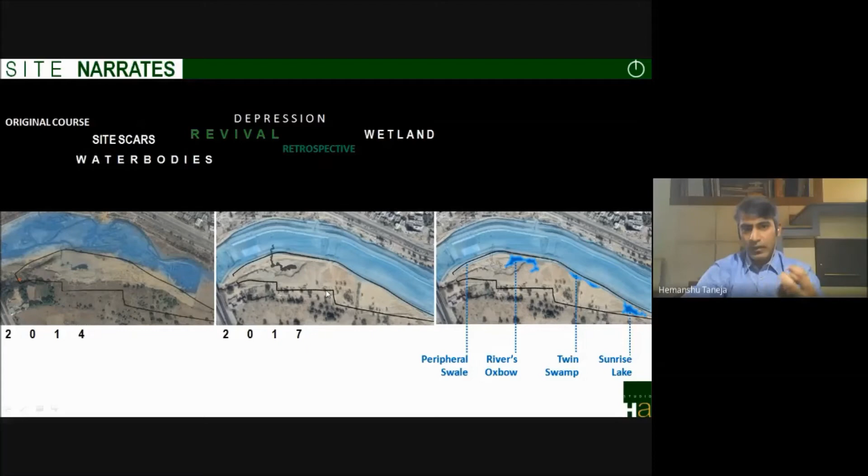So we thought of generating a small narrative, making a set of similar water bodies connected with bioswales to rejuvenate this existing element retrospectively. So this was the drainage, the slope of the site, which was towards the northern direction, and this was again a second reason of making the set of the water bodies in the northern direction connected with the bioswale.

So there were like 3-4 reasons which urged us to make the set of these water bodies connected with bioswales. First was to drain its own rainwater. Second was to generate that narrative. The third was to have the use of the northern potential edge.

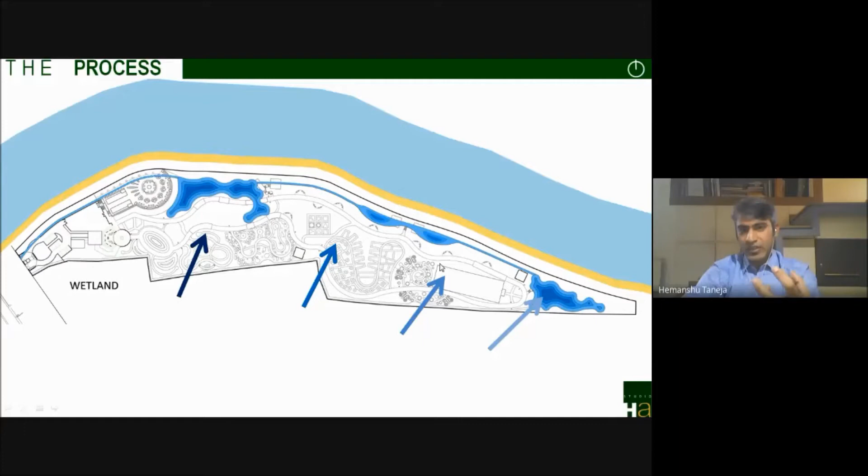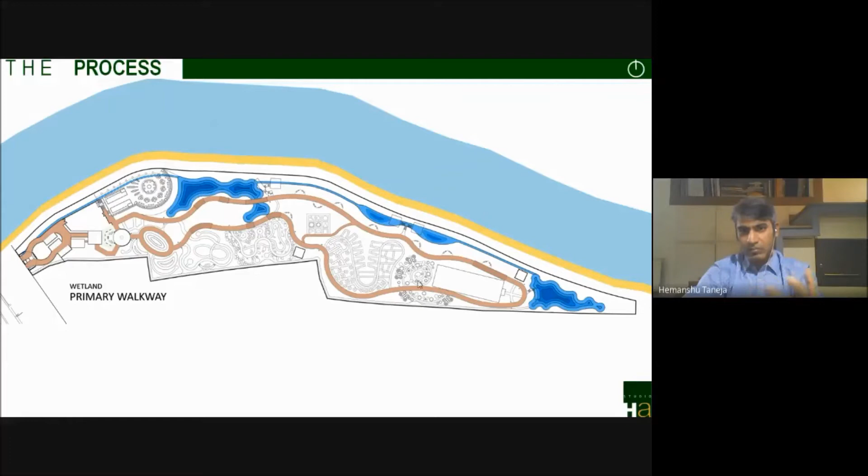And then in terms of master planning, in terms of the process, we then generated this primary loop which runs along the water bodies in order to establish all the other habitats which were required to make a botanical garden. We identified many such habitats to make it a botanical garden.

So we generated a character map to see which area fits in with which habitat. We generated many geometries to detail the connection of these botanical habitats. I will not go into detail of these habitats, but you can see these characters which we define.

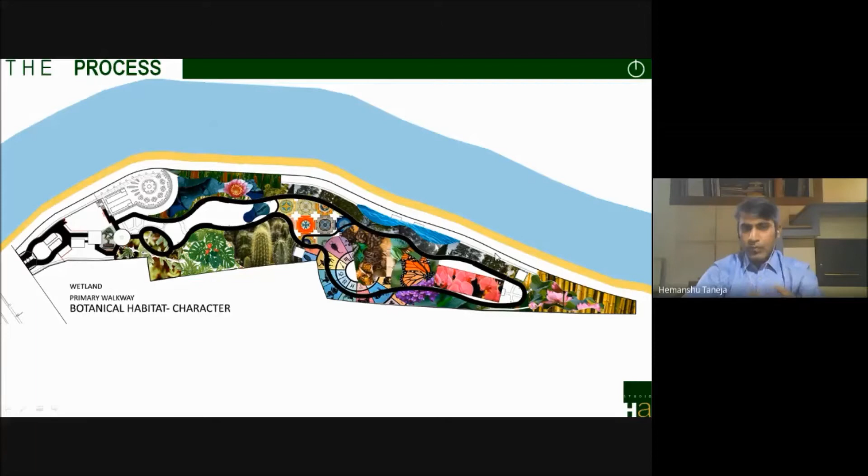You can see butterfly gardens, Ayurveda garden, Navgraha garden, the xerophyte garden, wetlands, and many other marshes. So this is how the site planning was done, and we came up with this solution.

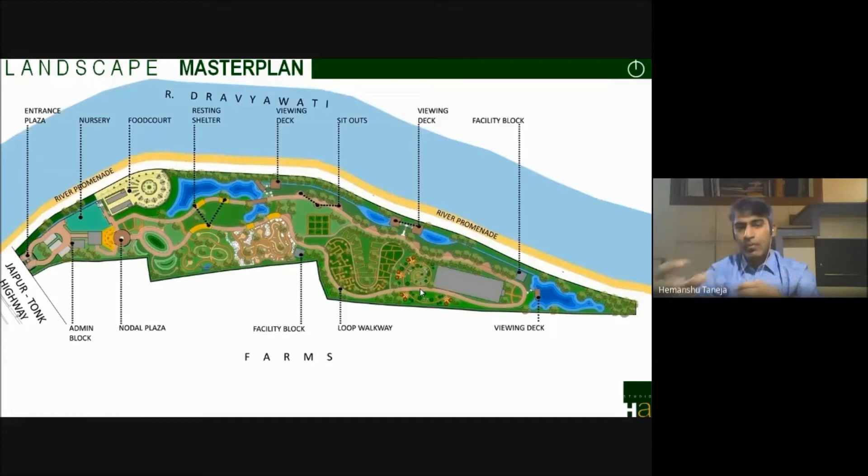So it was the amalgamation of these botanical habitats with various geometries, with the city level open space infrastructure and the facilities. We generated many viewing decks, a food court, nursery, ticket counter, and facility blocks. So this is how we made the amalgamation of the city level open space along with the habitats, turning it into a micro level ecological zone.

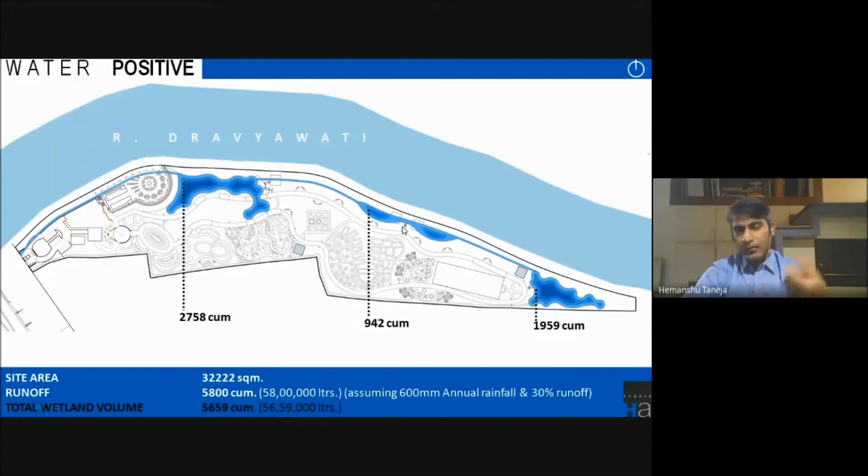So we designed these water bodies, their shapes and volumes, in order to catch 90 to 95% of its rainwater. There was a small brief calculation which we have shown here, through which we made these water bodies and located them in a way so that it catches all the rainwater, and the water remains till the summer month.

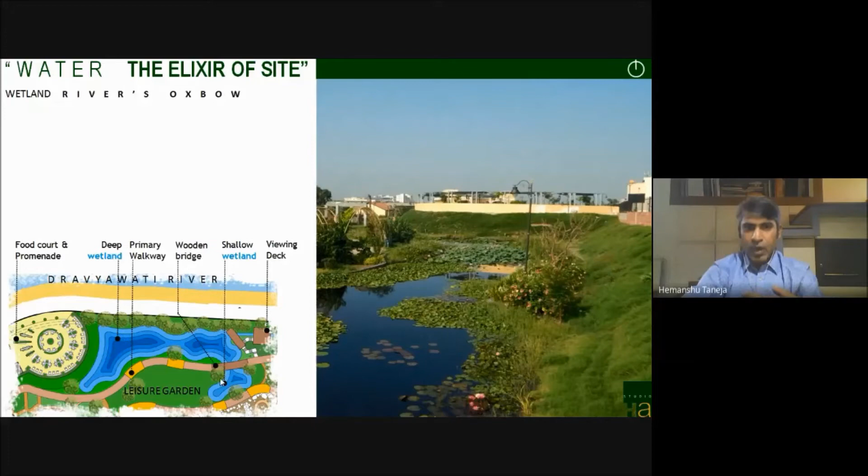So all these water bodies were located, their shapes and geometries were defined in a way that they interact with all the other typologies in the site, how it interacts with the food court, how it is creating a small ecosystem, how a water body sits in a leisure garden. You can see the relation of this food court with the water body, with the river edge, a promenade to see the views of river, and a circular edge here to see the panoramas of the site and the wetland habitat.

There was a third, last water body designed in a way called Sunrise Lake. It was designed to handle all the overflow of the water system, designed to again overflow its water to a swamp area which was the habitat of grasses and bamboos. It was located at the eastern direction, so we can also have good photographs of the rising sun and some good selfies with the morning sun.

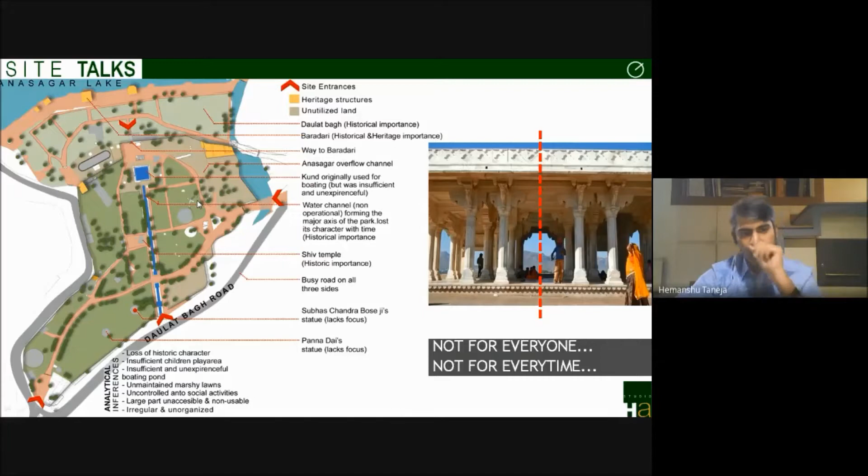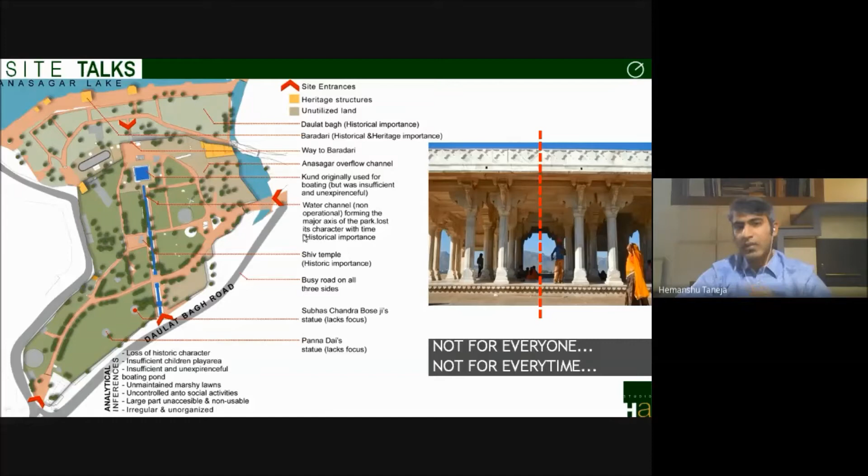The park was very irregular and unorganized, not designed well, and not working for everyone or at every time. So we designed it to work as a city-level open space for Ajmer, serving all age groups and user groups, incorporating all primary functions and leisure activities, and working across all seasons.

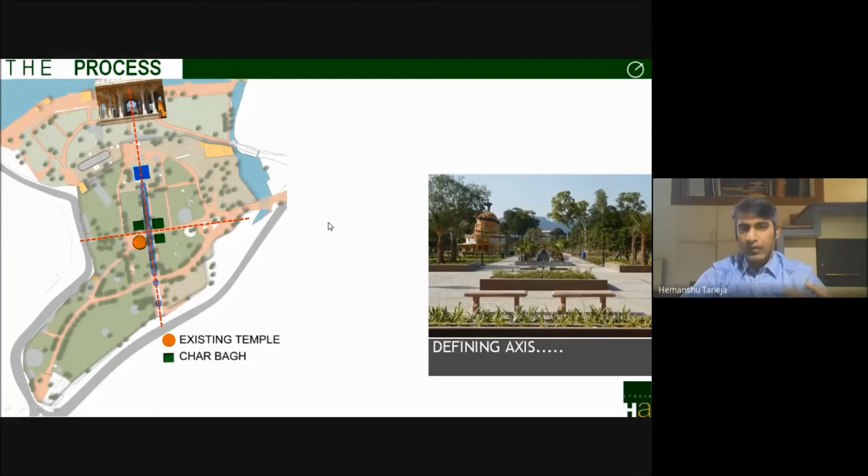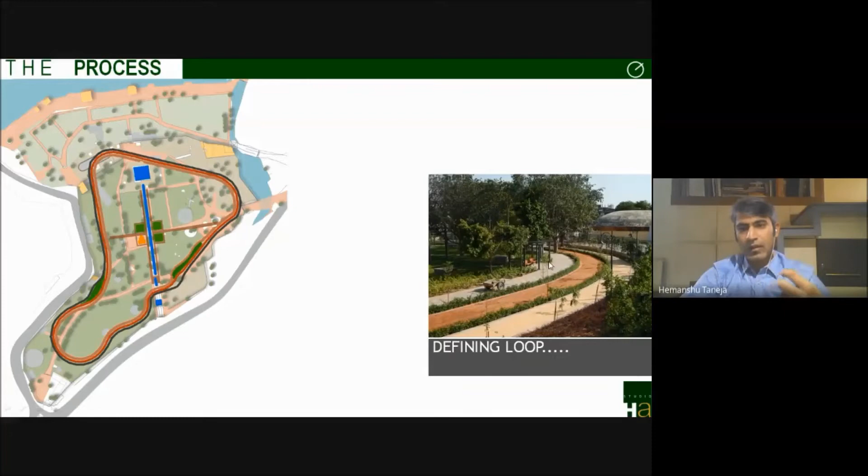In the process, we identified a primary axis connecting the Baradari water pavilion with the entrance gate along the water channel, where we designed a series of fountains and a water stream, and a cross axis respecting the temple, incorporating the four baghs to form a charbagh concept. We defined this axis, then the primary loop incorporating separate walking, jogging, and bicycle tracks with different specifications, and many crossways and nodes to respect that language and create interconnections.

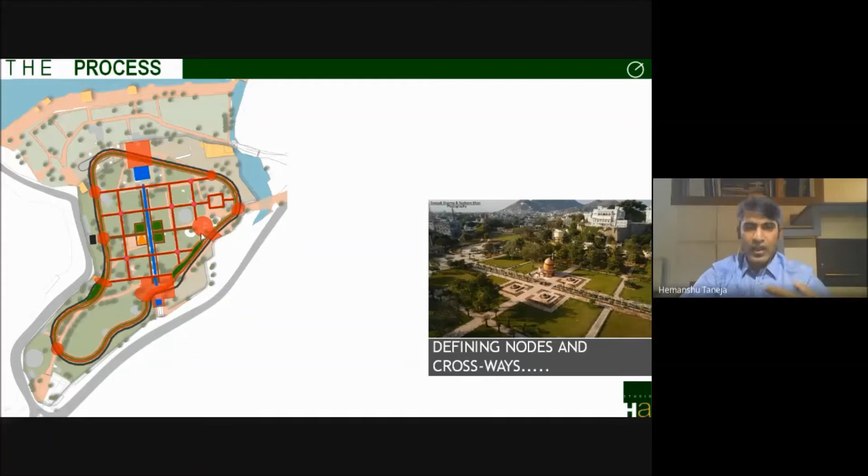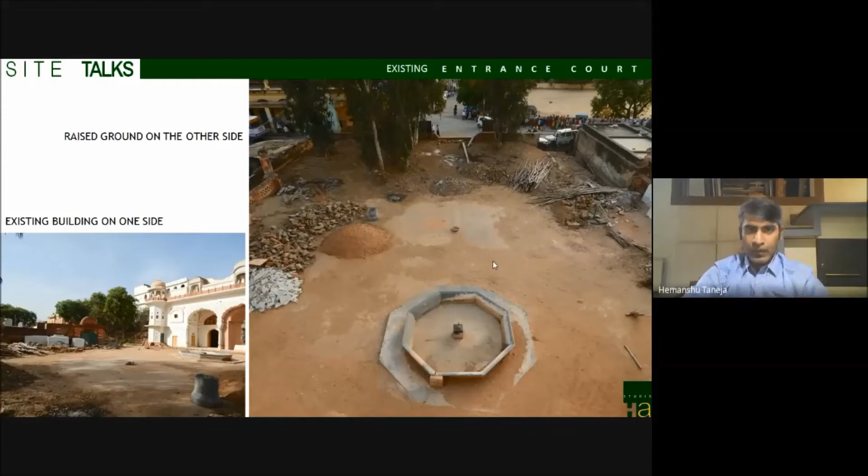After analyzing that, this is how we came up with the design solution: redefining that axis and making an open air theater over that raised ground, imagining the stage towards the direction of the palace, and respecting the old fountain by making a contemporary mandala flooring using Rajasthan stones and the locally available Khandela marble.

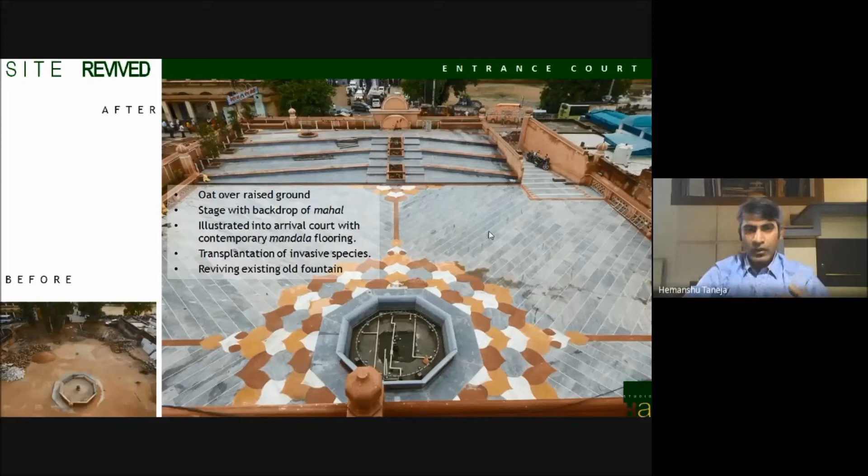This is how the fountain, the raised ground, and the existing site were enhanced and transformed. You can see in this photograph the fountain sitting with the Vivekanand Murti, and the gateway to another court, which was expected to be designed into a refreshment block.

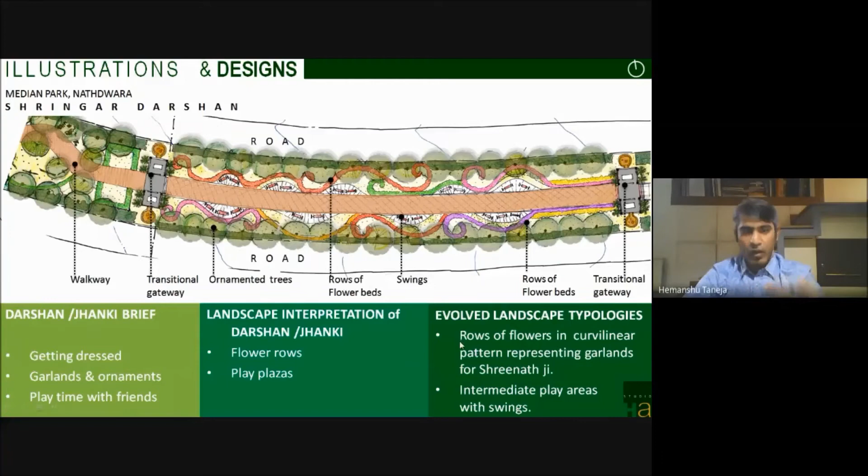You can see how we created these curves of flowers representing the garlands, and how we created these plazas having swings, creating play areas, and also acting as a waiting area along this walk.

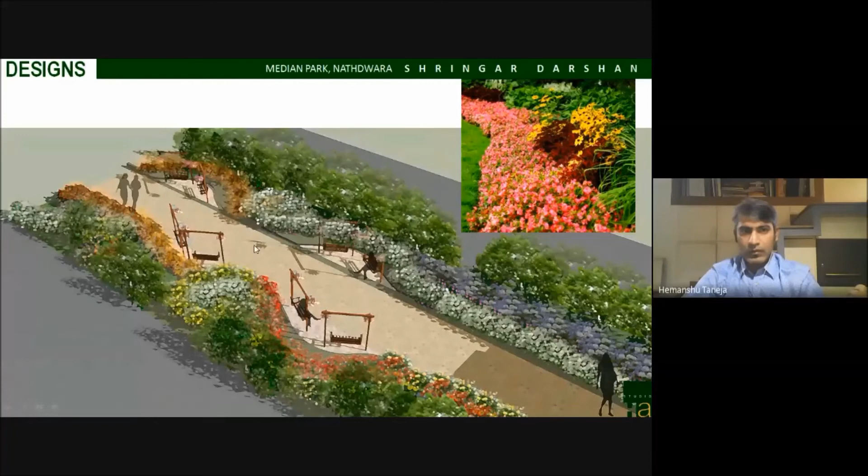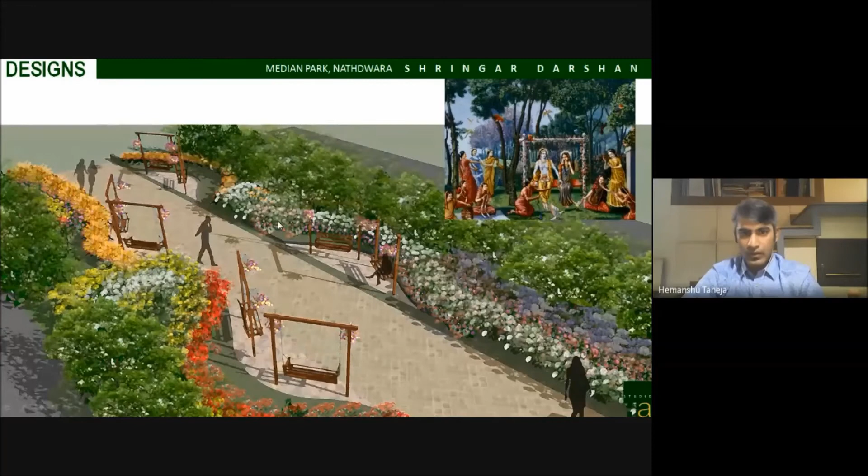You can see a few illustrations: the plaza with swings acting as a bench for the walk along this median, and the garland curves and hedges, the rows of flowers representing garland. The second darshan is Rajbhog darshan.

In Rajbhog darshan, Krishna is served with chappan bhog, a lavish lunch having varied colors and textures. It is offered, and this scene is always full of many devotees and friends.

So in order to create that scene, we thought of creating a large plaza, a large space which could occupy many devotees, demonstrating the Rajbhog again with flowers, with bowls of flowers having many colors and textures, and a large plaza having a large seating area. We also located Srinathji's Murti at the highest point of this median in order to respect the topography.

You can see the site is sloping that side. So this was the highest point where Krishna was located, and this plaza was created along with that seating and the Rajbhog bowls and the flowers.

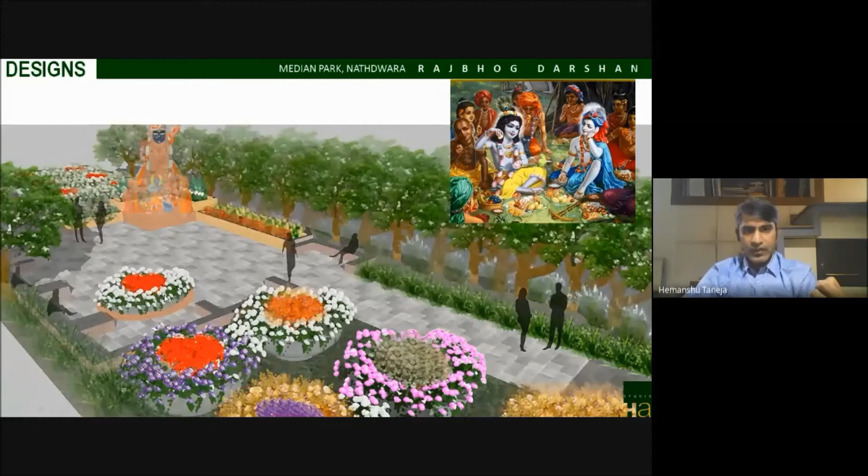These are a few illustrations showing the plaza with seating and the bowls, on that side and this side. The third darshan which I would be presenting is Uthapan darshan.

The Uthapan darshan is the scene in which Krishna returns after a walk with his cattle through the jungle, along river Yamuna, along with many streams and paddy fields, demonstrating the jungle and landscape.

So we tried to create a similar scene in this zone, creating the meander of river Yamuna acting as a planter showing the colors of life, and a walk crossing through this river with many trees and paddy fields, demonstrating that jungle and the landscape of Braj.

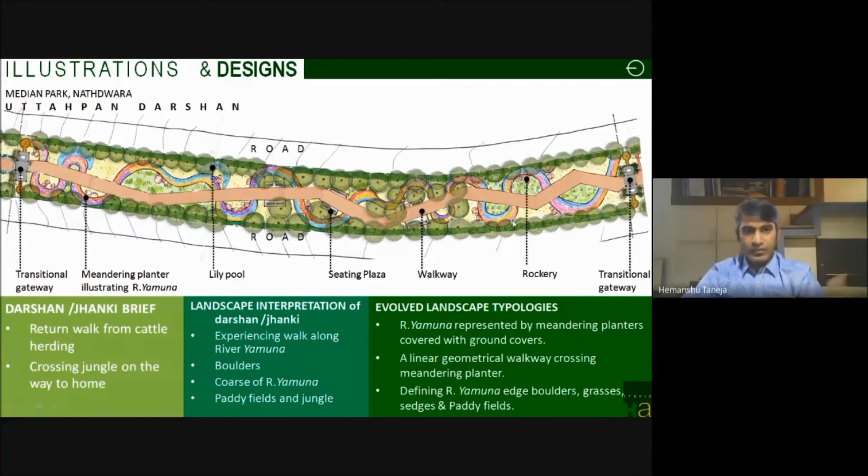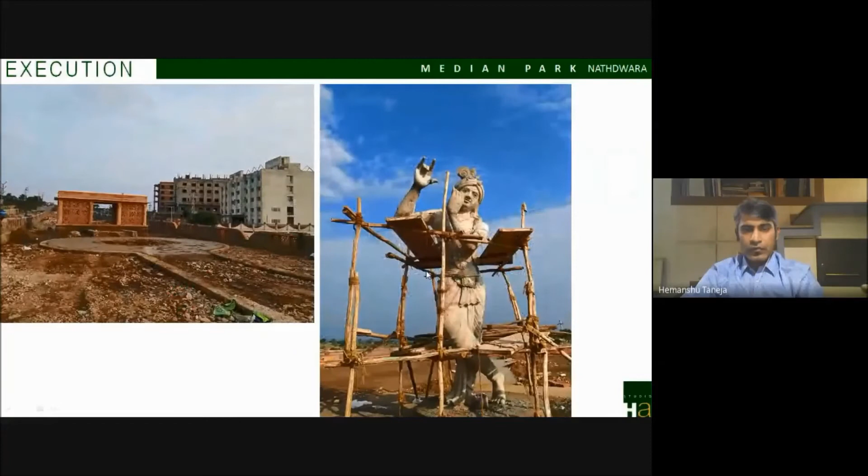A few illustrations of that zone: the river Yamuna and the walk. These are a few photographs of the ongoing site.

In the end, I would like to conclude that talking to the site can connect you better with your sites. It directs you to further sensible research and analysis which might be required for better design. You may come up with site-responding solutions, context-responding solutions, culture-responding solutions, history-responding solutions.

A landscape architect sensitizes their clients to understand site narratives and talks, and introduces the landscape language to them. It's our duty to make them understand what the site narrates, what the site talks, and what direction we should go in.

There are many projects in our private practice, either private or public, which sometimes try to align themselves towards the client's talks, but rather we should realign them towards the site talks, to make sensible, site-context responding designs.